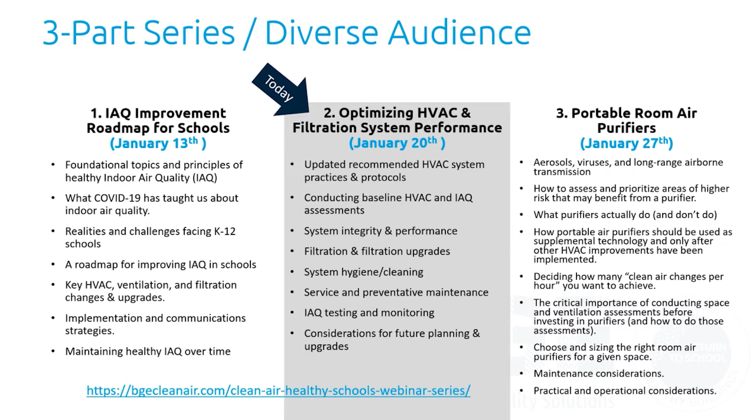So we will get started. One quick legal note, we're providing general guidance today. The biggest thing to take out of this: your facilities and the HVAC systems in your facilities are going to be very unique and quite a wide range. So none of this general guidance today should substitute for your own assessments of your specific situations and facilities, nor should it be substituted for the advice of a professional, whether it's from our team or another HVAC professional who's come to look at your specific systems, because everything is unique. So please keep that in mind today.

A little bit about us, for anybody that does not know. We're BGE, a Western Canadian indoor air quality and filtration company. We've been around since 1968, family owned and operated. We also, in 2021, became partly Indigenous owned. We are partnered with Fort McKay First Nation, which is just north of Fort McMurray in Alberta. We have 7 branches across Western Canada. We have our headquarters, our manufacturing, and our distribution center in Edmonton. That's sort of the hub.

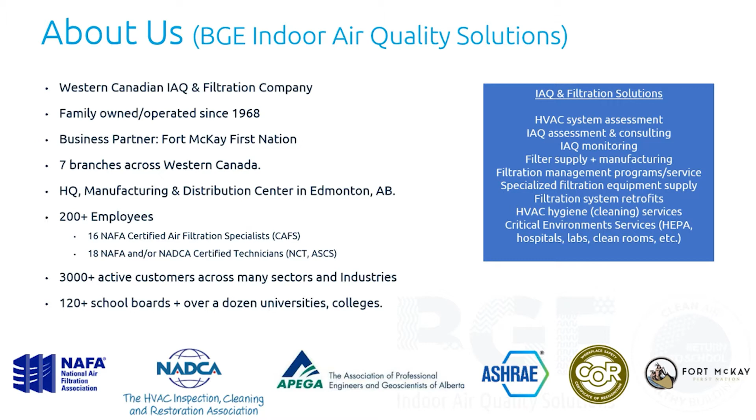And we have over 200 employees across the West here, including 16 NAFA certified air filtration specialists and 18 NAFA and/or NADCA certified technicians. We'll talk about those in a little bit later today. We have around 3,000 active customers at any given time across many different sectors and industries, and in particular, relevant for today and our audience, we also work with about 120 school boards across the West, as well as dozens of universities and colleges. So we're quite familiar with your facilities, your systems, your filtration, everything in between, and so we're happy to bring our perspective and our experience today to help you along this journey.

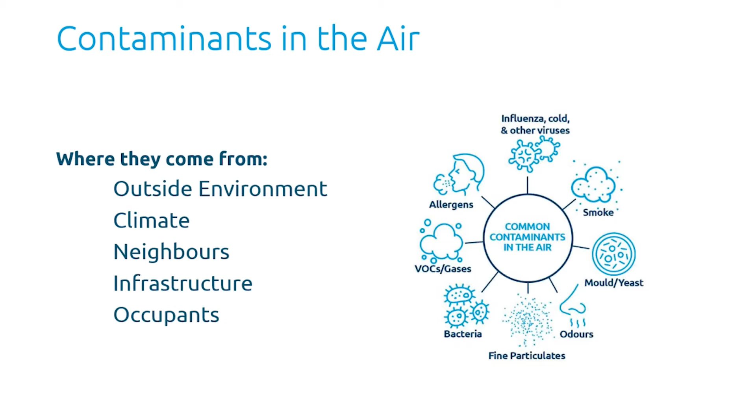So we have to take care of this. Why is indoor air quality important in schools? This is a nice quote we like from the EPA in the United States: good IAQ, or good indoor air quality, contributes to a favorable environment for students, performance of teachers and staff, and a sense of comfort, health, and well-being. These elements combine to assist the school in its core mission, which is educating children.

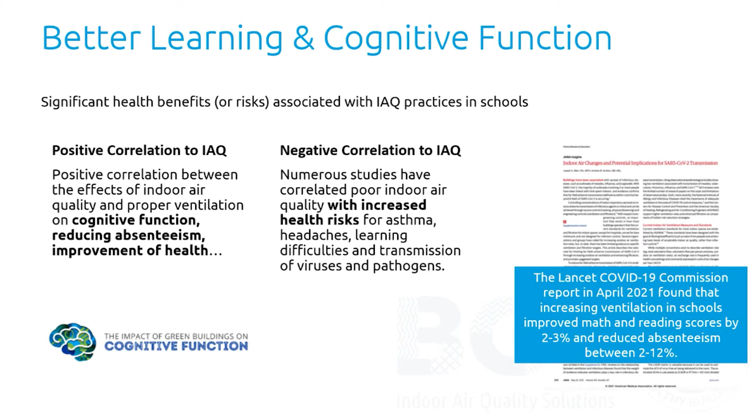There's a lot of science around this. Generally, when we have good indoor air quality, there are really positive correlations around cognitive function and learning abilities. There are literally endless studies on this, and the science is very conclusive. On the flip side, poor indoor air quality with a lot of contaminants has been associated with a number of health risks, and of course reduced cognitive function and reduced learning. There are links you can check out, but the science is very conclusive around all of this.

Now, this is the big one. We now know, and there's no credible authority that disagrees, that respiratory viruses—including SARS-CoV-2 and this pandemic, as well as colds and flus—anything that's coming out of our bodies as respiratory viruses, are airborne. We're becoming far more aware of this lately, and it has mobilized us to learn a lot more about indoor air quality. It's amazing—nobody used to know anything about MERV 13 filters and indoor air quality, we'd get blank stares, but now it's a household conversation. In a professional setting, we always say this conversation has gone from the boiler room to the boardroom. We have executives, business owners, heads of state, everyone talking about air quality now because of this.

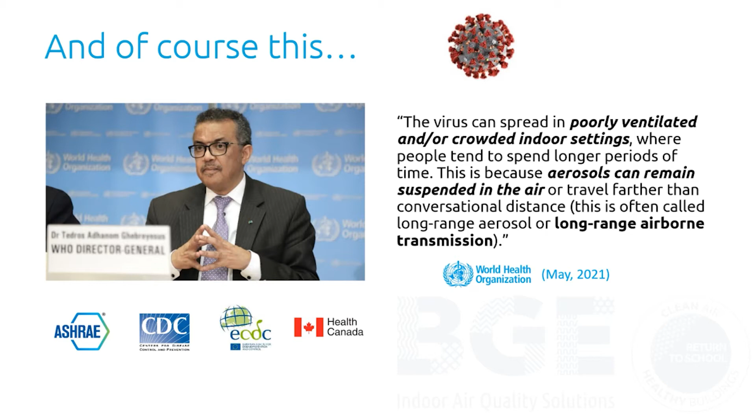But one of the major challenges we have with airborne contaminants is our buildings. Our buildings, and schools in particular, have not been engineered for indoor air quality and health to be healthy buildings. We've engineered them for thermal comfort, so we don't get cold or too hot. Generally, ventilation and filtration standards have been set based on the control of only the most basic contaminants—dirt and dust—and on generally subjective satisfaction with air quality. So we engineer our buildings and systems to make sure we don't get too many complaints, but it's very subjective, and definitely not engineered to be healthy.

A huge driver of this over the last number of decades has been energy efficiency, and buildings are a huge source of energy use in the world, so energy efficiency is very important, but it's probably been the primary dominant factor that's driven engineering of buildings over the last number of decades. The downside is we've created very airtight buildings with poor ventilation, and the air gets trapped in these buildings, gets stagnated, and the contaminants can't make their way out.

And then there's compounding factors. Not only do we not design buildings to be healthy, but fiscal constraints or lack of knowledge has led to a lot of deferred maintenance. We don't keep our systems up and running. So not only are they designed to not be enough to create healthy buildings, we compound that by letting those systems fall into disrepair, get dirty, and all kinds of things.

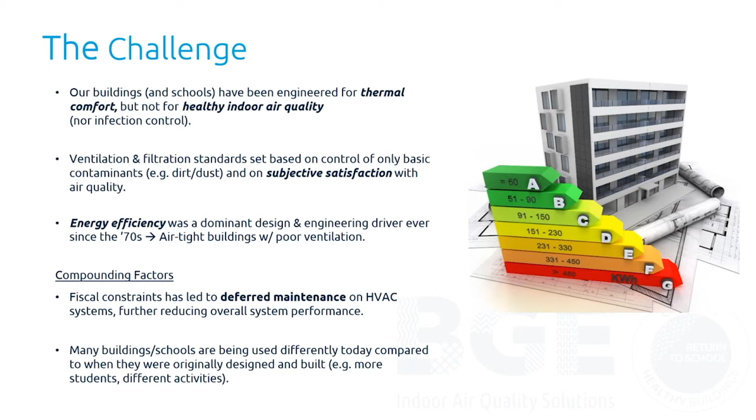Really quickly before I kick it over to Randy: at the end of the day, indoor air quality, there's two fundamental ways you can improve it. We can bring in ventilation — we can bring in fresh air from the outside and essentially dilute the contaminants inside and reintroduce fresh air into our buildings. Or the other way is through things like filtration — we can remove the contaminants from the air. So when we contaminate the air, we have ways to remove it through mainly filtration. That seems like kind of a basic concept, but it's important because it underpins everything we're going to be talking about today.

This was a framework we introduced last week, and it will continue to be the framework for this one as well as next week. Harvard University has an institute called the Harvard T.H. Chan School of Public Health, and within that School of Public Health there is a Healthy Buildings Institute. They do tons of research and provide information on indoor air quality and healthy buildings. It's an excellent resource for those of you that weren't here last week. The link is there — go check it out.

They've actually customized a whole Healthy Buildings module just for schools, called the Healthy Schools program, and we really like the framework. It's a very simple framework — on the left, this inverted triangle, 1, 2, 3. It's really a framework for guiding indoor air quality improvement, with three simple components.

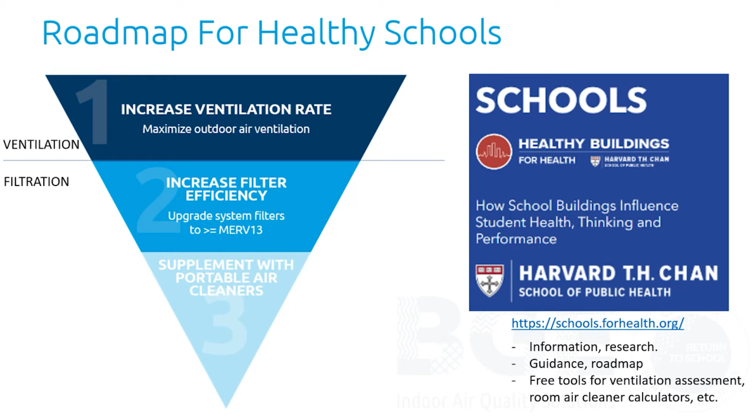And of course, in a building, how do we get those 3 things? We have our ventilation systems, our HVAC systems can bring in outside air. Our HVAC systems can also filter the recirculated air, and then of course the HEPA air purifiers. So again, this 1 plus 2 plus 3 to get to 6 air changes per hour is an important concept moving forward.

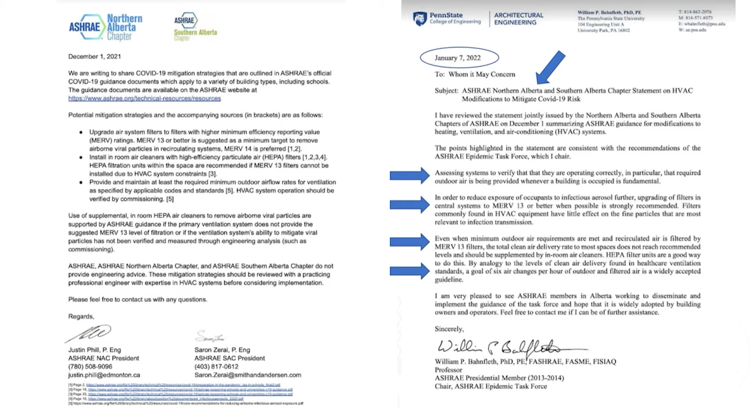So it's maximizing our outside ventilation, getting our filtration in our HVAC systems to MERV 13, and where we cannot get to the 6 air changes per hour from a combination of 1 and 2, recommending that we supplement and get to our 6 air changes per hour through the use of HEPA air purifiers.

And again, just clarifying that the 6 clean air changes per hour really is for infection control, and that's based on healthcare best standards. So if you go into a hospital, you're going to have a minimum of 6 clean air changes per hour, and it'll go as high as 12, 15. But we know that at 6 air changes per hour, we make significant improvements to indoor air quality, both for viruses, but also really all of the contaminants.

So the ASHRAE guidance is very consistent. I know there's been a lot of confusion about this one. We'd be happy to chat about this more a little bit later, but the guidance is quite clear now. So moving forward here, just again, 1 plus 2 plus 3 to get to 6 will guide us.

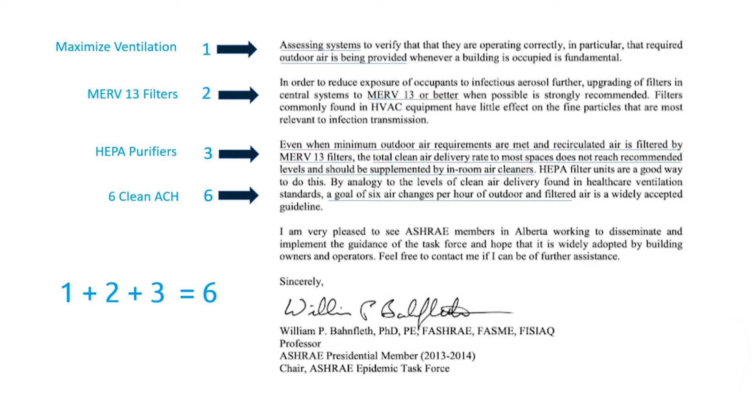You know, ASHRAE's standard for all of this stuff is 62.1, and their last update had quite different standards. MERV 8 is more of a standard than MERV 13. Most of the ventilation rates are not near 6 air changes per hour. In fact, for schools, it's under 3. If you look at the ASHRAE tables for ventilation, they average out to about 2.7, 2.8 air changes per hour.

But the important thing is the rest of the guidance we're providing is not based on ASHRAE 62.1 right now, because ASHRAE has the Epidemic Task Force, and effectively they made some key changes to the recommendations to 62.1, in particular around the filtration to MERV 13 and the ventilation rates and air changes per hour. So the rest of our guidance today is based on the Epidemic Task Force guidelines, not the regular 62.1 standards.

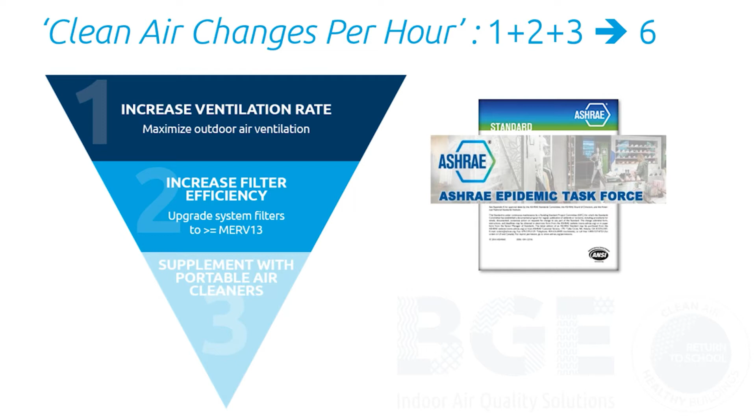So you want to adjust your supply return air fans to the highest possible rate, occupied mode, 100% if you can, depending on your building. Now, some of these things really depend on your system and what it can take. While you're doing that, you should adjust the percent of outside air to the highest level possible. I mean, 100% would be perfect, but when it's minus 40 in Alberta, you're probably not going to have 100% outside air. So it all depends on your system, and your staff should know what that can handle, or you can have HVAC specialists help you with that.

And once you get all these levels up there, you may need to have a look at the balance of your system.

Increase the runtime. The epidemic task force recommends 3 complete air changes of outdoor air between occupied times. If you don't do the calculations, they recommend just running it for 2 hours in the morning before students or teachers come in, and 2 hours after the last person leaves. Disable your demand control ventilation and run the fan full time.

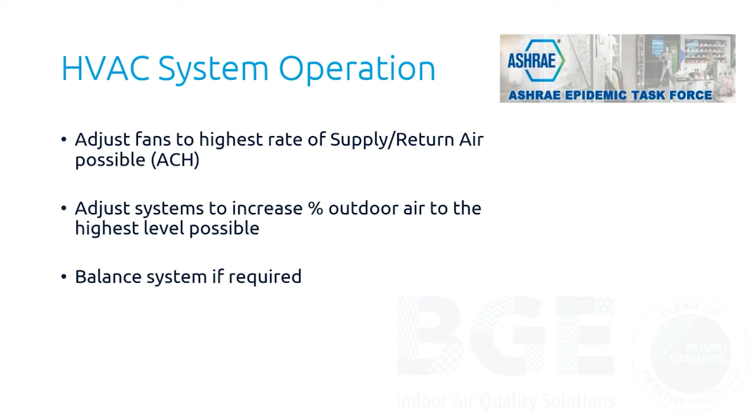They also recommend controlling temperature and humidity, which helps control viruses and particulate in the air. In winter, the recommended temperature is 22, in summer 24. Humidity should be 40 to 50% in winter, and 50 to 60% in summer. It depends on the part of the world you're in, and if you even have humidity control in your school, it might be tough to get 40-50% in the prairies in the middle of winter.

Dirty coils have a huge effect on airflow. There aren't many units I've been in that wouldn't benefit from having the coils cleaned, and it makes a big difference in getting as much air as you can into the building.

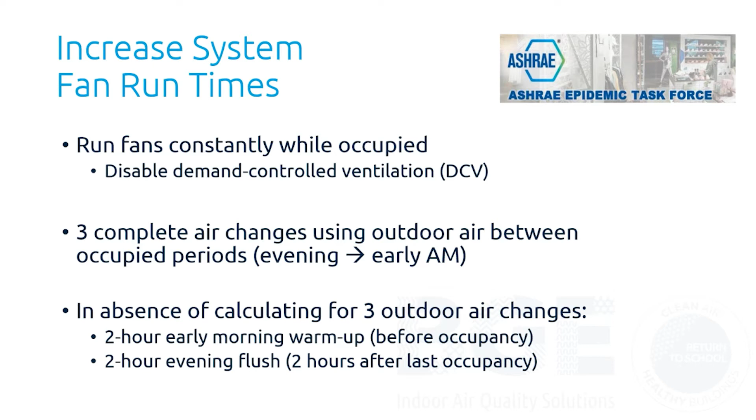There's a NADCA white paper that tested the impact dirty coils have on airflow. It's a little hard to see, but there was a 54% improvement in airflow when they cleaned the coils, improving the CFM in the system. It went from 300 CFM before to 460 CFM in this example of an 8,100 cubic foot space, which added 1.2 air changes just by cleaning the coils.

So just bumping up your system, if you don't look at system hygiene, you might be missing out.

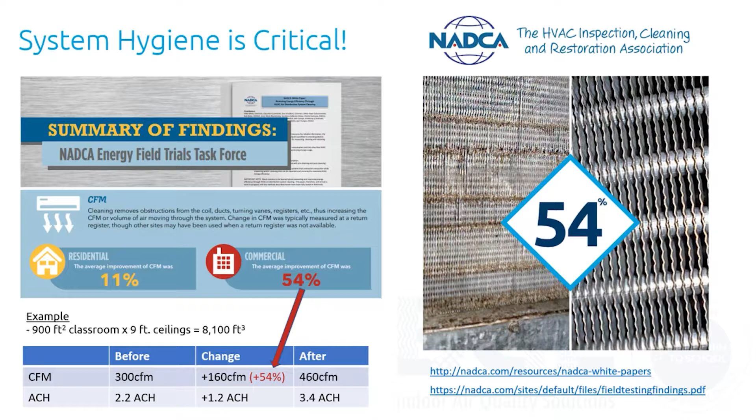If you're not sure what to do, there are NADCA certified technicians that can help you with this. They can come and inspect it and see what needs to be cleaned and the proper way to clean it. We do have NADCA certified technicians on our employ if you're looking for that, or there are lots around North America that can help you out. Any of these things we talk about today, we may be scratching the surface on, but we'd be happy to help you dive deeper if need be.

So once you've got your system cleaned and as much air coming through it as you can, let's talk about filters.

They've recommended upgrading system filters to MERV 13 minimum or greater if you can. 14 is better, the Epidemic Task Force says. Now, obviously, this depends on your system, the size of ducting, and the number of stages in your system. There's a lot of variables and every system is a little different.

Why MERV 13 or greater? Well, because these little fuzzy balls ride on aerosol particles that carry them. Those are particles, so we can take them out of the air with mechanical filtration, and MERV 13 is pretty effective at capturing those.

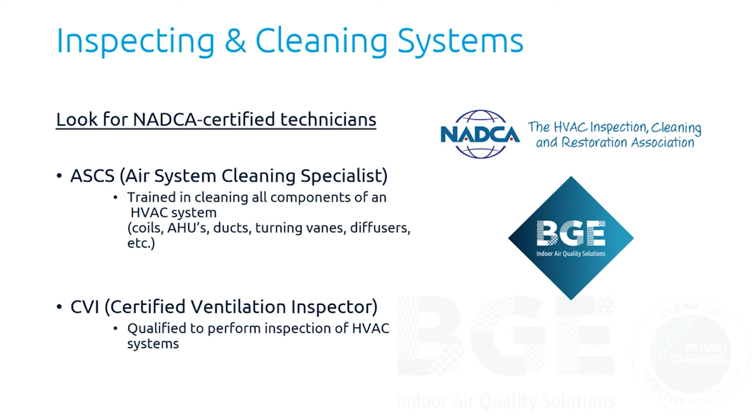Here's another reason for MERV 13. MERV 8 is probably around the level or less, depending on the filter historically used, which takes about 55% of those size ranges we just talked about. If you get up to MERV 13, you're doing a pretty good job taking those out, almost 90%. So you'd need to run through that MERV 8 filter over 4 times to take out the amount of particles that one pass on MERV 13 will take out. And once you go up to MERV 14, you're almost at 95%, so you're really affecting the air in that space.

Now, I get this question all the time - everyone talks about how a MERV 13 filter might hurt my system.

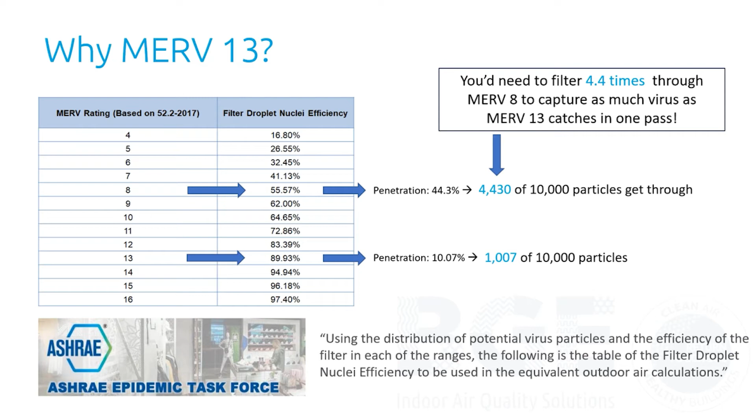Now, having said that, every system is different, and you need to talk to a professional to confirm that. It could have a 1-inch track, 2-inch, 4-inch, or 2 different tracks. But in this example, just to show you the difference in pressure drop on a 2-inch filter, which most commercial systems would have.

So if you're using right now just a fiberglass disposable panel on a MERV 7 or 8, or a standard pleat, you can see the initial pressure drop is 0.24 to 0.32. Well, a high capacity MERV 13 2-inch pleat is only 0.34. So if you look at the final resistance, you may only be running the glass panel to 0.6. Your system may be able to handle that, or it may be able to go a little higher.

You don't have to run the filter to the manufacturer's final recommended resistance. You can change the filter based on what your system can handle. So it's not that big of a jump to go up to a MERV 13 that everyone seems to think it is. Most commercial systems, I believe, should be able to handle a MERV 13. You just may have to change it a little more often because it's stopping more particles.

So the goal of every filtration installation is system performance, not filter performance. You can upgrade these filters, but if they're not sealed, you're not really upgrading the filters. So your entire system needs to be looked at.

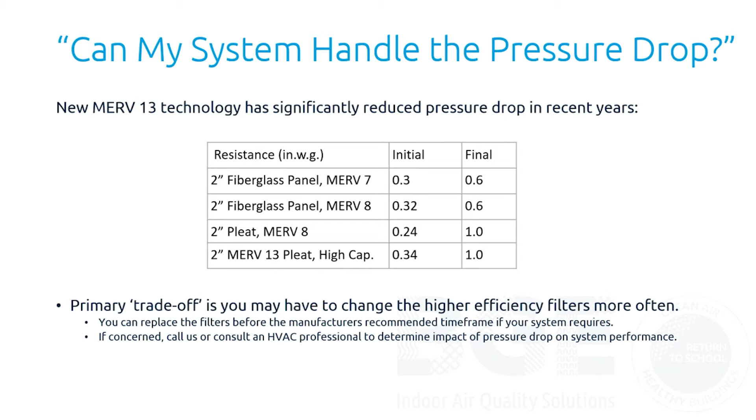We're going to look at some of the things you will actually run into. From our founder, Darrel Sutton, his favorite line was, if it does not fit, it does not filter. Air takes the path of least resistance. If it can get around a filter, it will go through and zoom through there, taking everything with it. And the more efficient the filter is, the denser it is, so the air is going to try and get around that even harder.

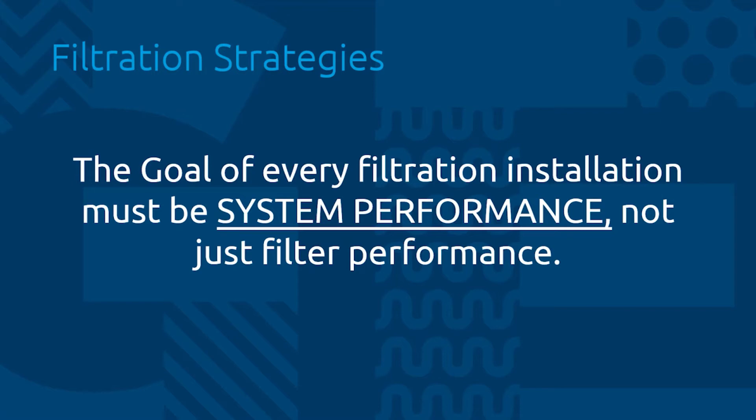Fit is as important as efficiency. As I was just saying, if you increase your MERV rating but you don't make sure it's sealed, it's wasting your money.

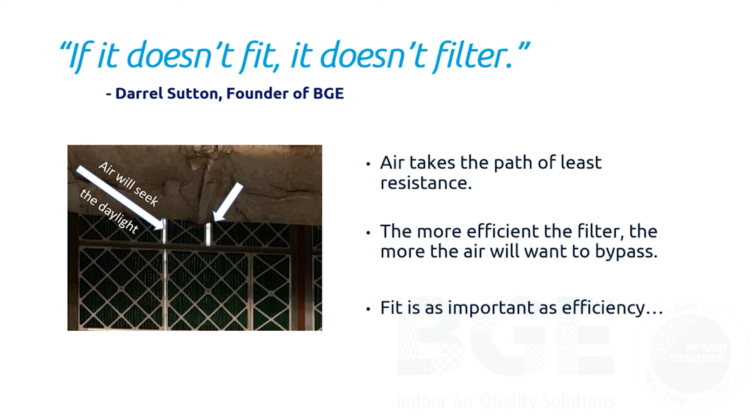And here's a good example. A MERV 14 filter with a 1/4 inch of bypass along the side, like we saw in that last picture, can take it down to a MERV 12 filter. And once you get to 3/4 of an inch, which really isn't that much when you look at it, you're down to a MERV 8 and lower. So this is where, if you're going to upgrade to a MERV 13 or 14, you really need to make sure that unit is sealed.

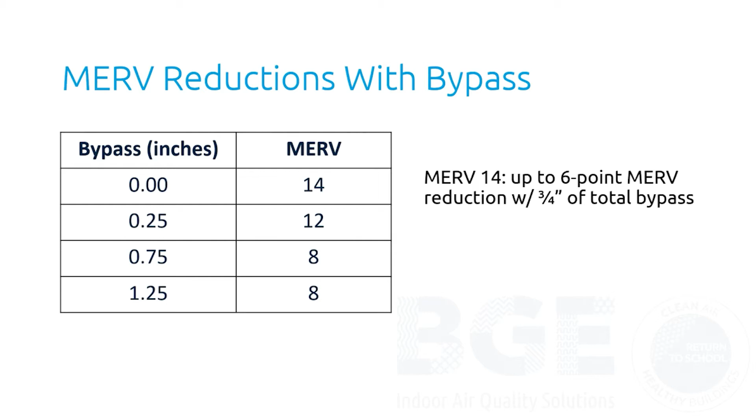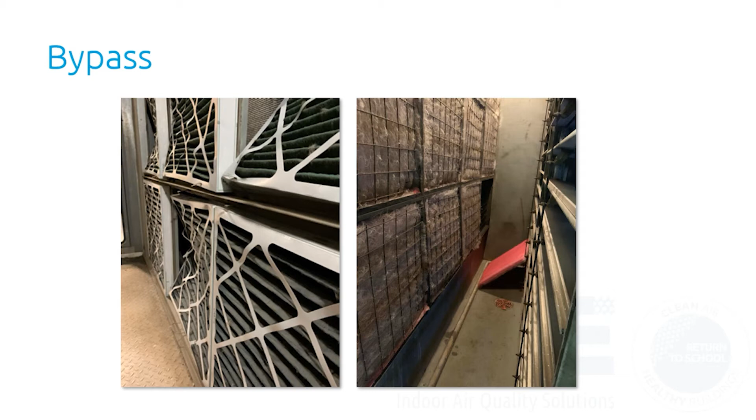Bypass - this was a good attempt on the left to add a bit of filter there to make sure it fills the track, but you can put a metal spacer in there, even a wood one, and fill that space, or get the right size filter. You need to fill that entire track with filters. Even on the right, it looks pretty good, but it doesn't come quite to the end, so you have that 1/2 inch gap at the end. That's dropping you a couple of MERV ratings for sure.

One of the good ways to make sure this is done on a front access system is the clips. Make sure you have clips. In a perfect world, you'd have 4 clips on every filter. Make sure they're not damaged, and they'll hold those filters in place and push them against the gasketing to make sure they're sealed. And speaking of gasketing, you need to make sure that it's installed correctly.

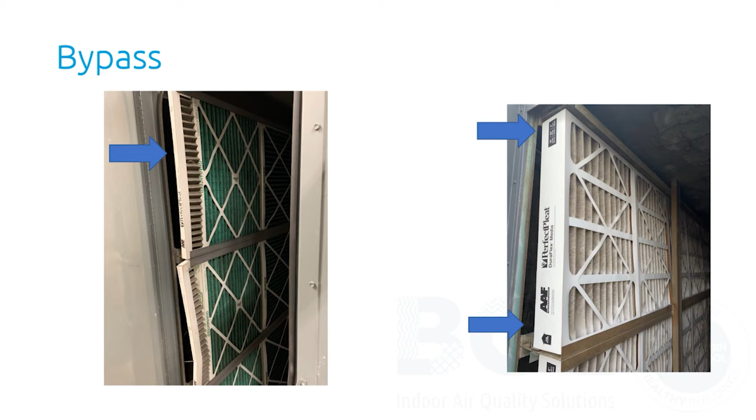On the filters is a great place to have it, because every time you change the filters, you get new gasketing. You've got to make sure that it is applied correctly and it sticks there. The one on the left is obviously falling off, and the one on the right, there is gasket there, but you can see it's deteriorating, and it is behind the clip. It should, in a perfect world, be in front of that. So if you had that on the final filter, every time you put the filter in, you get new gasketing.

It's easy to forget to change that gasket when you're doing it, and you only notice when the filter's not in there. In a side access bank, there are easy ways to seal it to make sure the air is going through.

You can tape in between the filters—that's perfectly fine. You can caulk in between the filters if they're going to be there a while too. One simple thing is, even on side access units, put gasketing on the sides of the filters so when they meet, it seals. Side access units can be hard to seal, so do the best you can.

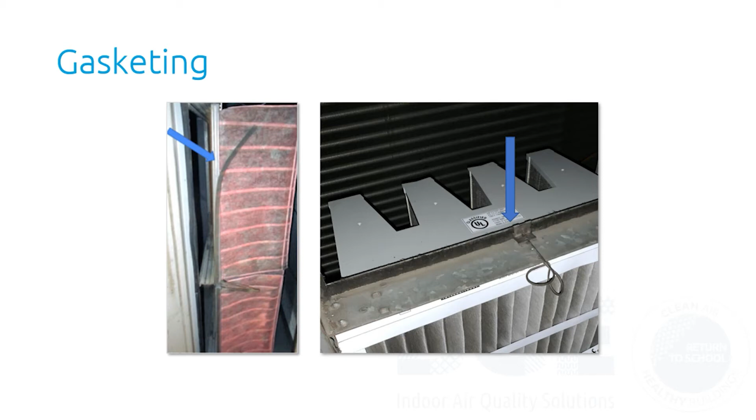The gasket is falling off the filter, but on the good side, they have gasket on the sides of the filter. The spacer is actually stuffed in the tracking instead of properly installed—I'm not sure why, but they just threw it in there. The tracking is very dirty, and this is the air that you're breathing in, so keep it clean.

Show your pride in your building. The filters don't actually come to the door, so there's probably a 2-inch gap there. These are actually MERV 13 filters, but they're probably performing about a MERV 6. The door gasket, though, is in great condition.

So there are good things, but all these issues are what lead to air bypassing the filter instead of going through it and working, which means you're not getting your money's worth out of your filters.

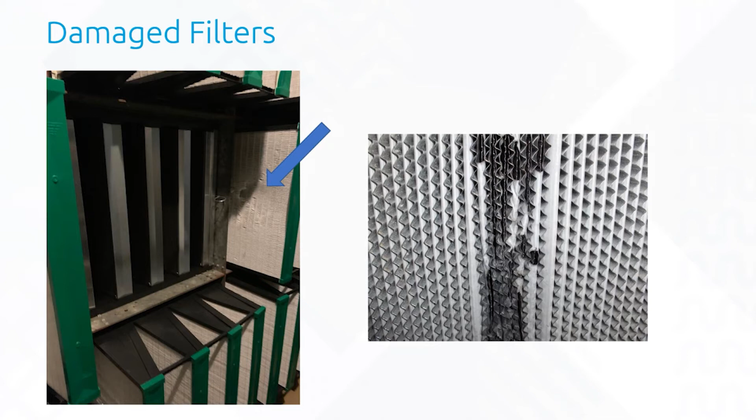You should consider the filters dangerous. Not life-saving dangerous, but you should consider they could have COVID or other viruses in them, absolutely. So you want your PPE—coveralls, gloves, goggles, and a mask. Take the filters out and put them in plastic bags while you're in the unit or beside it, before you wander through the school or facility with them.

Keep them sealed and dispose of them, but treat them with respect, because you don't know what's in those filters—they could have been in there for months or years, and things could have built up.

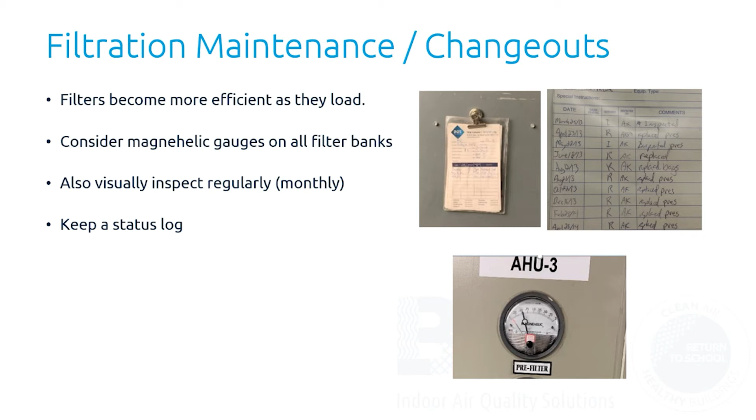Training and certifications: the National Air Filtration Association has a certified air filtration specialist program. As Ian mentioned earlier, BGE currently has 16 CAFS on our staff. There's also a NAFA certified technician program, which we're qualified to give to your staff so they understand the importance of the filters, changing them, how the system works, sealing, and everything I've talked about.

So any of this, if we can help you with, we'd love to. We also have 18 NCTs on staff too, to do some of the work if you want.

So all of this is things you need to do before you start looking at everything else. Make sure you've got as much air going through, and as clean as possible, before you start everything else. This is the place you need to start, and then move on from here. So I'd like to give it back to Ian, and he can carry on from here.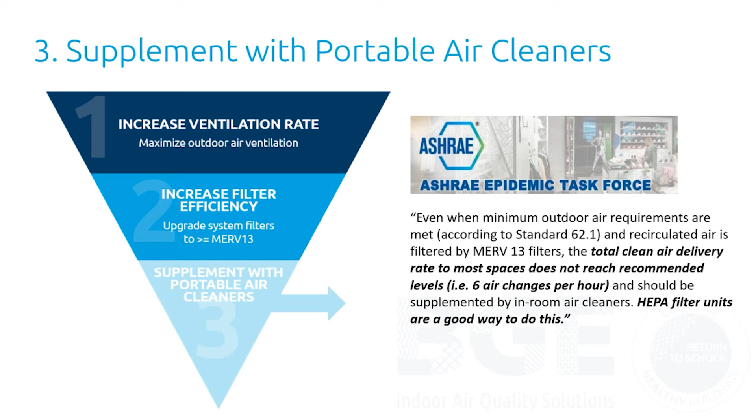Again, just to remind everyone that they're additive. We want to get to the 6 through a combination of all of these things.

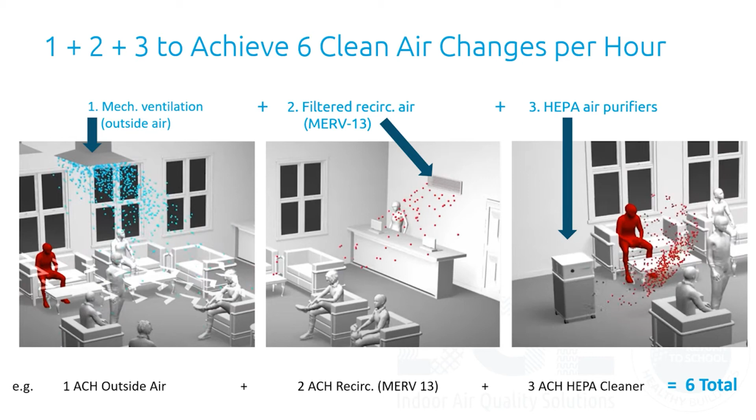So why is ASHRAE and others recommending the HEPA purifier? At a basic level - and next week we'll go through lots more of how these work and the guts of them and why they work - but first and foremost, they add additional clean air changes per hour by removing contaminants directly from the air. This technology has been around for a long time. They're quite effective at cleaning space right in the rooms. In fact, in the industrial space, we see this exact same technology for what they call emergency gas scrubbers. So if there are leaks of dangerous gases, we can seal off the area, deploy these types of units, and they scrub the air. They're very, very effective.

So we get to bring that technology out into regular spaces now, but it's well-developed technology. There are multiple layers of increasingly advanced and efficient filtration inside these units. Obviously, the final layer inside these things is a medical grade HEPA filter that can really get to the smallest particles and the very smallest of aerosols. So with a combination of all the filtration inside these units, we're able to capture virtually all the contaminants out of the air.

They're very effective at scrubbing not just viruses and aerosols, but particulate matter, volatile organic compounds. They're great with smoke - a lot of these units have a layer of carbon filtration that's great for forest fire season. Certainly other viruses, colds, flus, mold, bacteria, everything. The point is they're very effective on airborne aerosols and viruses, but they're also really helpful units going forward beyond the pandemic. Colds and flus are always around, and this virus is going to turn into a seasonal flu type of thing as well. So these things are really effective well beyond the pandemic. Don't think the investments in these units are a waste - they're really good enhancements to indoor air quality for our health and our healthy buildings.

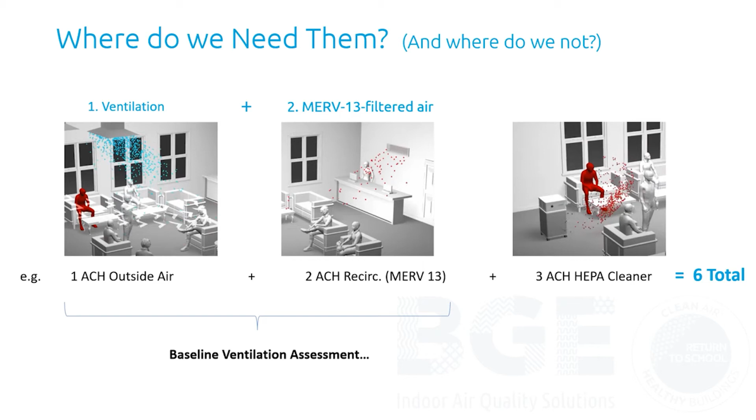Now, I'm going to just start with this. This is definitely not perfect nor super scientific, but it is an acceptable method for initial ventilation assessments. At the end of the day, I'm not going to go through all these details, but you've got an HVAC unit. We should know, or we can find out, the CFM ratings on that unit. That unit will supply airflow.

Sometimes one unit supplies one space, but typically they're distributed and supply different zones within your buildings. So if we can figure out what set of rooms or spaces that unit is supplying, we can do basic calculations, assuming the system is reasonably well balanced and we're getting relatively even airflows into all the spaces it's supplying, to estimate air changes per hour. That doesn't require any technology or monitors, and it's a reasonably acceptable way - a method a lot of facilities have been using.

And then certainly over time, there's advanced methods. One of them, CO2, is a very good proxy indicator for ventilation, because as you put 35 children in a classroom as an example, we know generally how much CO2 a human being - both kids and teachers, adults - will exhale sitting there. So we can get baseline measurements of CO2 in the room and then do calculations.

So we're going to go into this quite a bit next week. Again, we'll show you some examples and case studies of rooms that we've calculated, but it's a well-accepted method for getting at your ventilation rates as well.

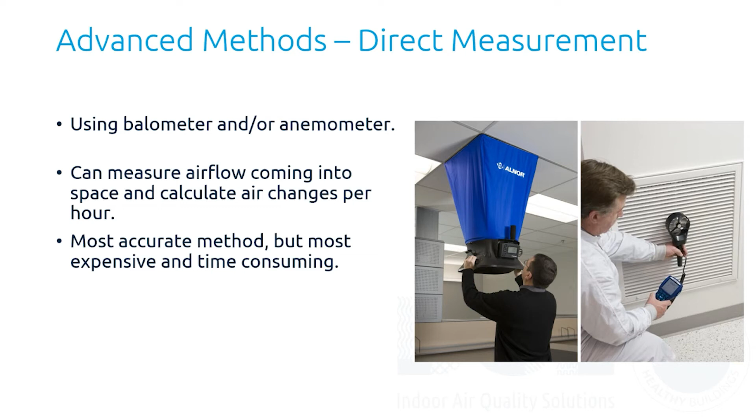So that's really what you're trying to get at inside the facility. I'd say start simple and verify it over time. The desktop method, just calculating based on the throughput of your units - you can start there, and then over time maybe consider some of those more advanced techniques to verify the desktop calculations you did. You can chip away at this over time in the facility.

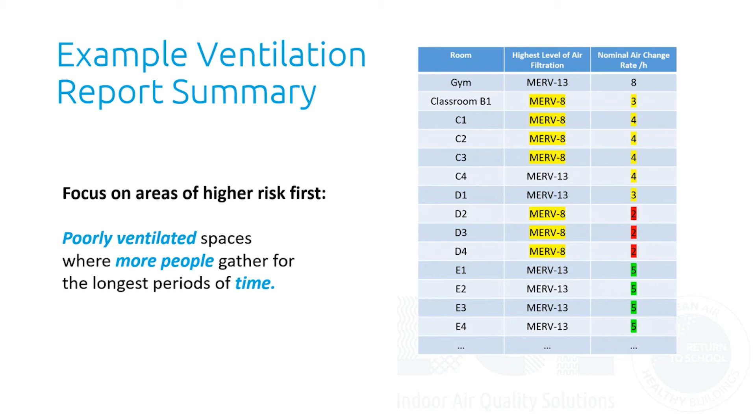So once you figure out what we've got from our air handling units, then the difference we want to make up with the room air cleaners. Now we're going to go deep into this next week, and we're getting a little short on time as well. But just a really quick caution on these units.

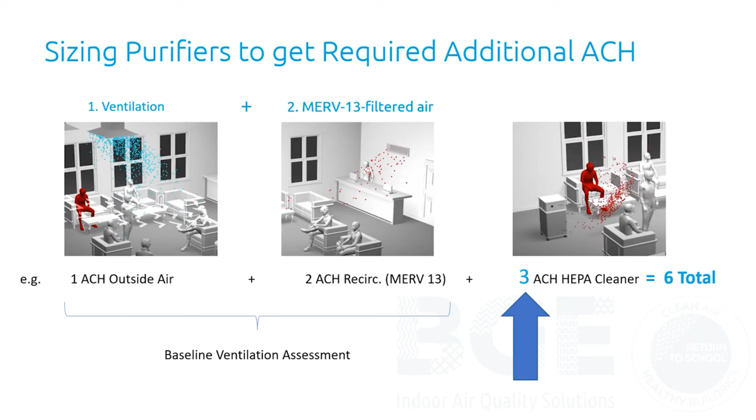But we have yet to see any unit that could ever be run on high in a classroom. They're just too noisy. So realistically, in a classroom setting, most of these will have variable speeds, but they'll have a top speed, a medium speed, and a low speed. Medium is quite reasonable.

There's a bunch of other considerations we're going to look at next week on how to size these properly. But that was one I just wanted to highlight, and there's one thing you should take away.

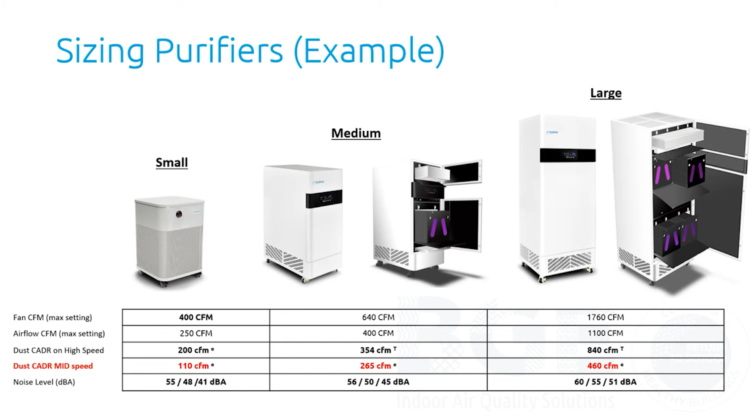Just quickly, 2 smaller units can often be better than 1 bigger one, because you can use them to place and create optimal airflow patterns within the rooms.

And remember, this is a piece of equipment. They're very simple, designed to run for many years, but they're still a piece of equipment. So like any other equipment, you have to inspect and maintain them, and they've got mechanical filters in them, so those filters have to be replaced. Just make sure you're considering that in your total cost going forward.

Like I said, we're going to do much more next week. We've got a whole hour next week dedicated to purifiers, and we're going to dive deep into all of that, so you can join us then for more.

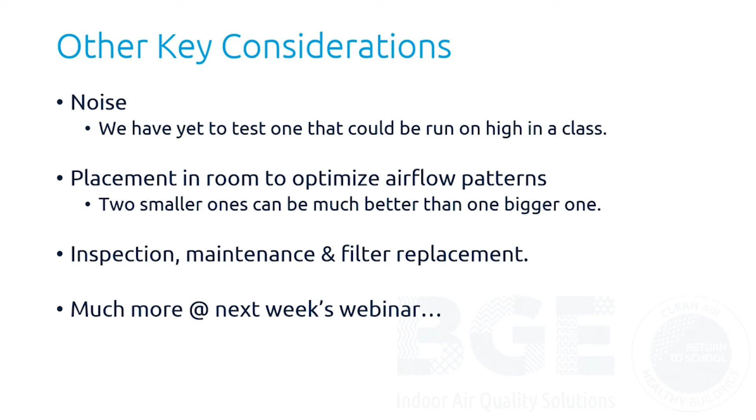Okay, so just finishing off here with a simple management framework that you can use to go about all of this work. We use this on our own facilities and with our customers and our service teams where we go and take care of this work on behalf of our facilities. But it's a great framework that we thought we would share as a way to go about all of this.

It starts with 4 steps: assess, go assess your systems, then make a plan based on your observations and those assessments, start chipping away at that plan, and make sure you're managing it over time.

Really simple, assessment—we talked a lot about that today. So how do you assess your systems, assess your filtration, do ventilation assessments? It all starts there because we need to know where we're starting. We call this our assessment report. We can help with these assessments, your HVAC mechanical contractors can help with these assessments, and you can perform them yourselves. There's a lot of this work you can do yourself.

So it all starts there, because now, based on those assessments and where you found deficiencies and opportunities to improve your indoor air quality, make a plan based on that. You want to itemize things, prioritize them. We showed as an example the ventilation assessment, how we can even color code and target those areas that have really poor ventilation. But it's all about planning and prioritizing.

So create a plan, and then this is really important: communicate. Particularly in schools, we're seeing a lot of you are under pressure because you've got parents and different stakeholders saying, what are you doing about air quality? If you start with the plan and communicate, saying here's where we're at, here's what we're going to be working on, we are seeing it's buying time.

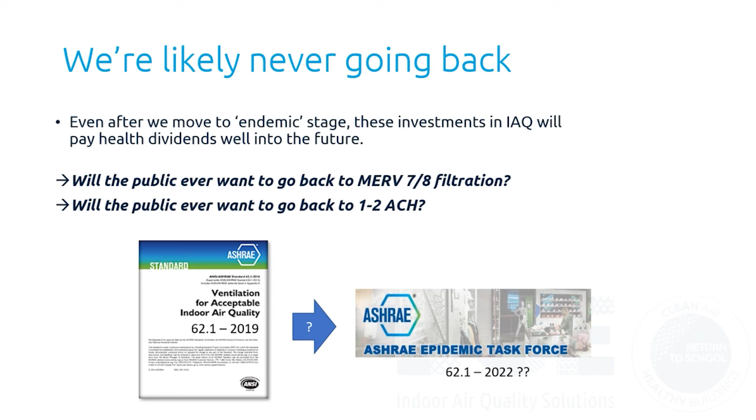One final thought I'll leave you with - there's a great book by the fellow Joseph Allen, who runs the Healthy Buildings Institute at Harvard. He's also a co-author of a book called Healthy Buildings, and there's a great quote in there that the person who manages your building has a bigger impact on your health than your doctors.

So we've got lots of important work to do. You have important work to do in your schools and facilities, and we're here to help you get started on this. So thank you very much.

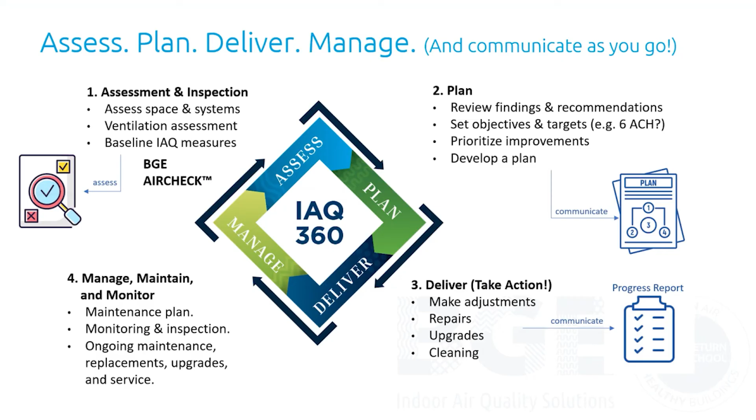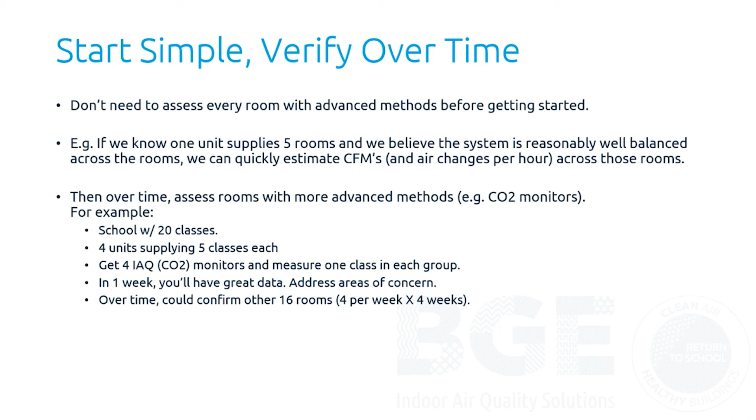You don't have to go room by room by room. For example, if we know we have a set of 5 classrooms supplied by one unit, if you want to be conservative, go to the room at the very end of that HVAC run that likely has the least circulation. Do the test there, and for now apply that across the 5 rooms to see if we were way off with our desktop calculations, or close. So take a school with 20 classrooms, 4 units, 5 rooms each - with 4 monitors in a week you could get a pretty good sense of what's going on in different rooms. Then over time, move those monitors and test every classroom if you want.

So I would suggest definitely a week. Corey's follow-up: my question was pertaining to NAFA certification, as I'm an HVAC-R mechanic. Yes, you did answer, okay. And yes, we can give you the NCT designation.

Jesse, is there available assessment or research on the risk of exposure during HVAC filter changes, or is the recommendation based on common sense?

I don't know of any specific tests on that. I'm sure they've done some research, but it's generally common sense, because it really depends on when the filter was last hit by COVID. It's hard to be sure, so you just assume it could be there. Right now it's probably common sense.

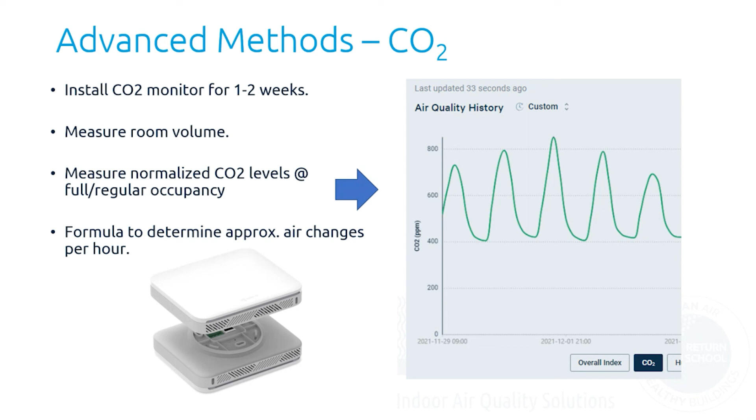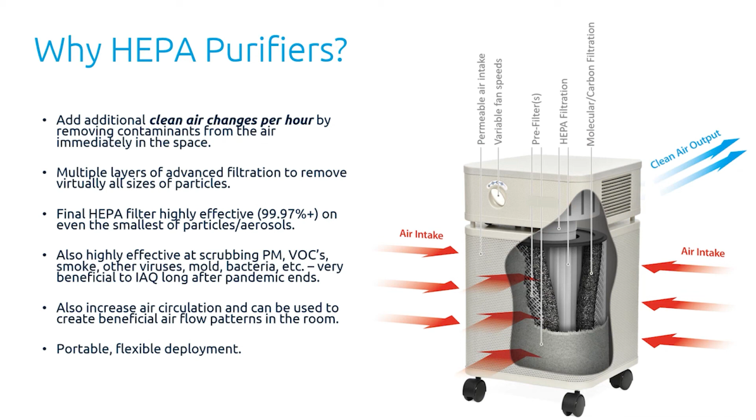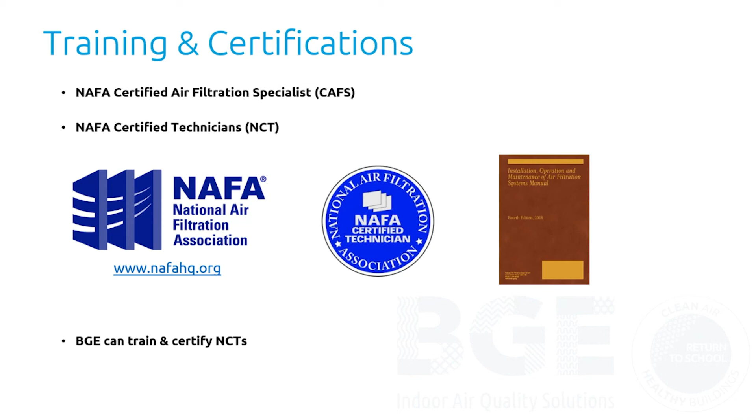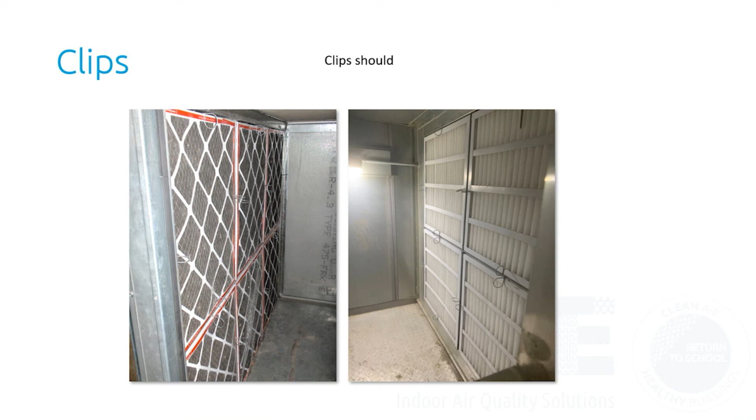Amanda just answered your question for you there, Ian. Oh, there we go, she found it on CDC. Okay, well, thank you, Amanda.

0.3 to 1 micron, yeah, those are the smaller ones for sure. They believe there's a pretty good concentration at the 1 to 3 micron size, which is at 85%. On the smaller ones it's still 50%. That's why ASHRAE recommends MERV 13 or higher, since 14 and certainly 15 are more efficient. We do have schools, especially recently built ones, with two-stage systems that can go to 14, and 14 and 15 start to get more efficient at the 0.3 to 1 micron size as well.

I think, unless there are others, that looks like we're getting close to the end of our questions. So unless any last minute ones come through, Randy, we can wrap up.

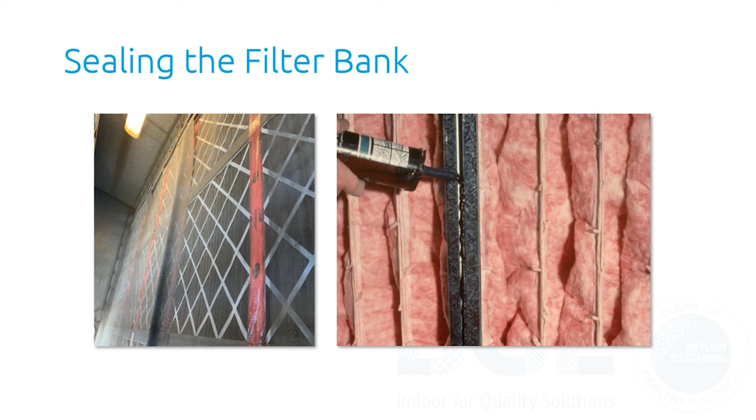Corey asked if we were in Edmonton or Calgary. We are both. We're in Vancouver, Prince George, Fort McMurray, Edmonton, Calgary, Saskatoon. We also have a representative in Regina, thank you, and Winnipeg. So we've got folks all over that can help.

Oh, I meant where can I reach out to you? Oh, me, Randy and I are in the Edmonton branch. I'll put our emails in the chat if you'd like. I'm actually in the Calgary branch, but I'm in Edmonton often. Oh, did I say you were in Edmonton? Sorry, I meant Alberta. Yeah, Randy and I are in Alberta. You're in Calgary and I'm in Edmonton.